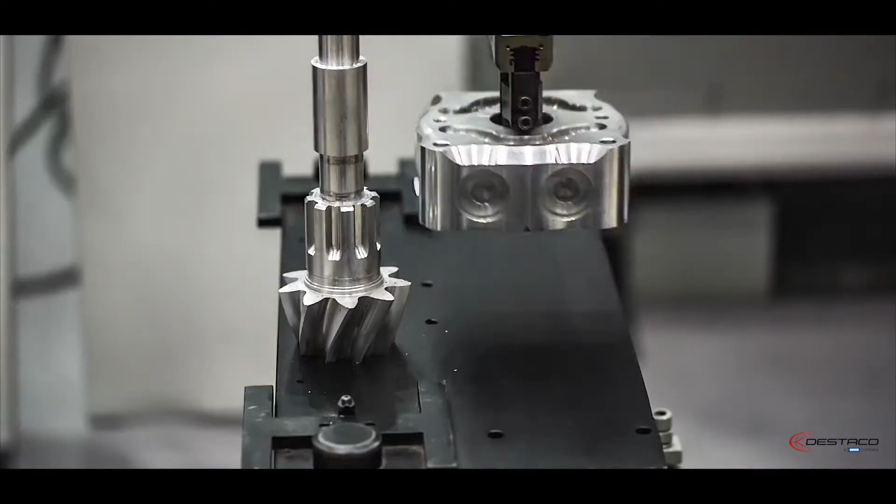As you could see from the agenda posted on our website, today's event is about the different aspects of our gripper and positioning solutions, such as how do I select the right gripper and how could this gripper drive productivity in my production, and how could an indexer provided by DESTACO support my productivity in operations. In our roundtable discussion at the end of the event, we will share latest updates on innovations and new products with you. I would like to point out that we will be offering another event on work holding and end effector applications during the second half of the year. The exact dates will be posted well in advance.

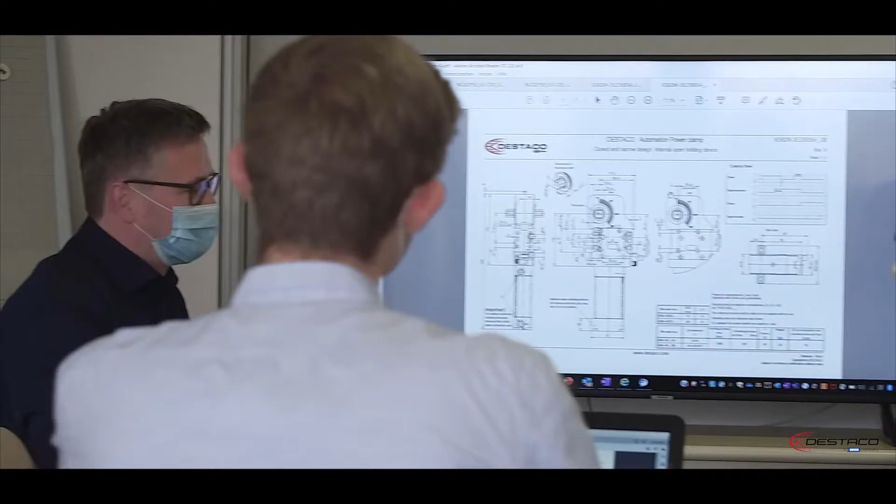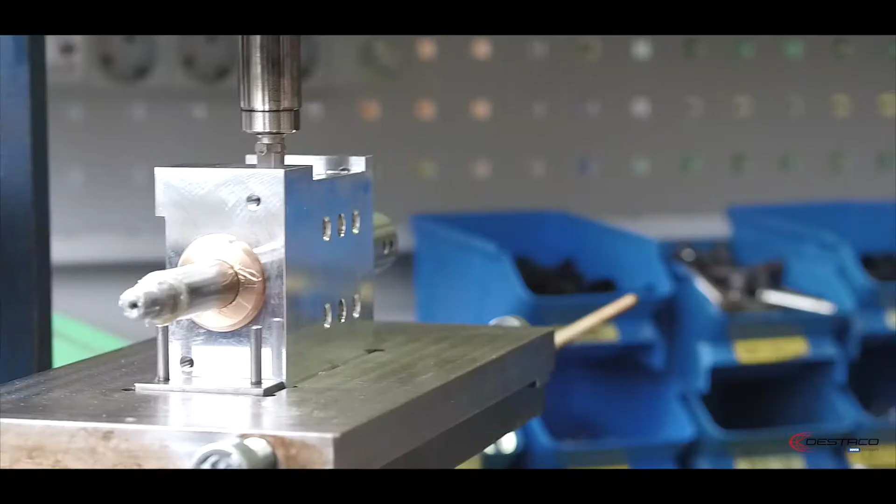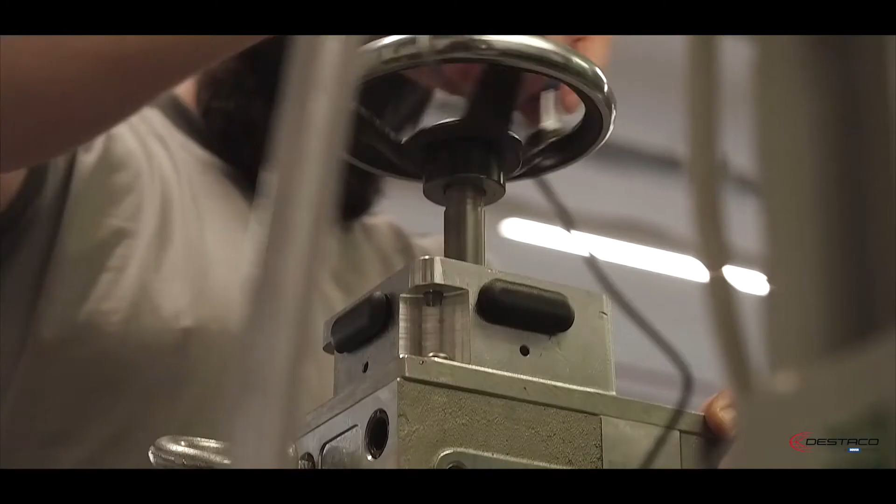DESTACO is your partner for high-performance solutions in automation, work holding, and containment. The plant here in Germany has tremendous importance for our customers, as well as for us, since it's specialized for the assembly of very complex custom applications. What defines us here in this plant is the very good qualification of our employees, as well as the flexibility that we bring in every day in order to meet the customer expectations.

Founded in 1915, DESTACO is a Dover Corporation company.

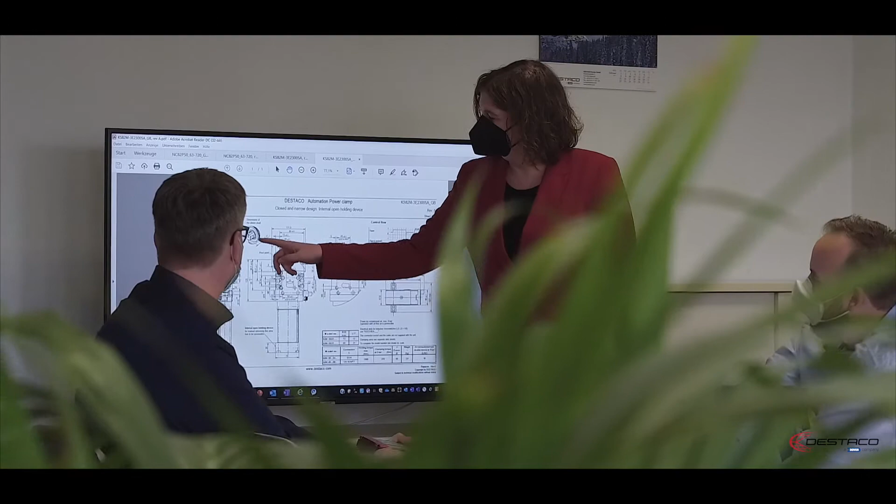My name is Nina Wollep. I'm the Global Engineering Manager at DESTACO. With my team of engineers and designers, I ensure that your demands and wishes are transformed into actual products, precise and with an innovative spirit.

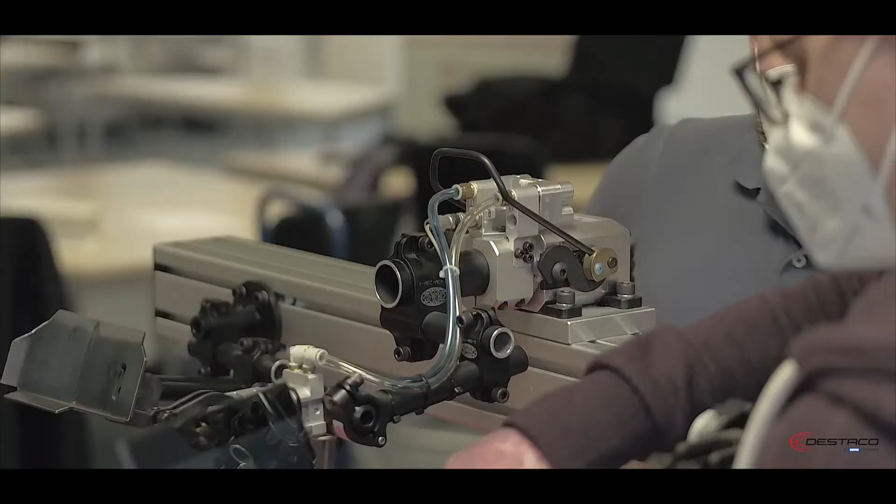My name is Christian Schubert. I'm a Global Product Manager at DESTACO. I'm responsible for planning, controlling, and strategic alignment to launch products on the market successfully. Proximity to the customer is particularly important for DESTACO to bring innovative solutions that solve your customer needs.

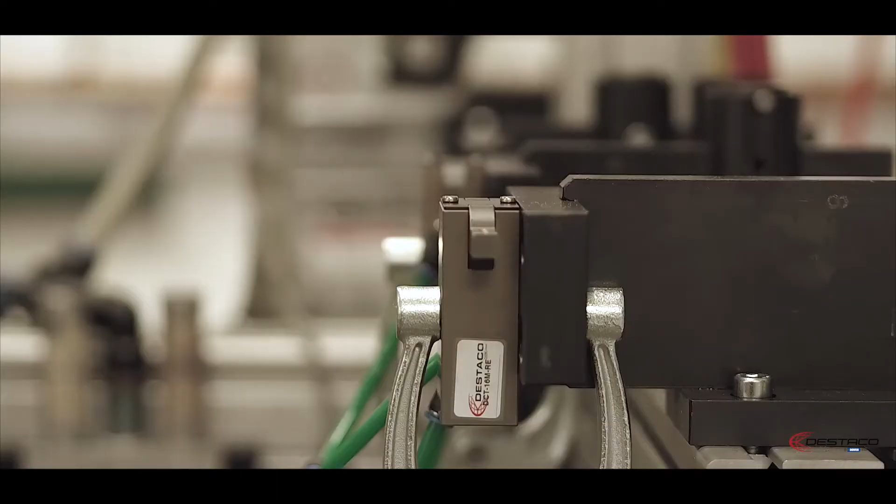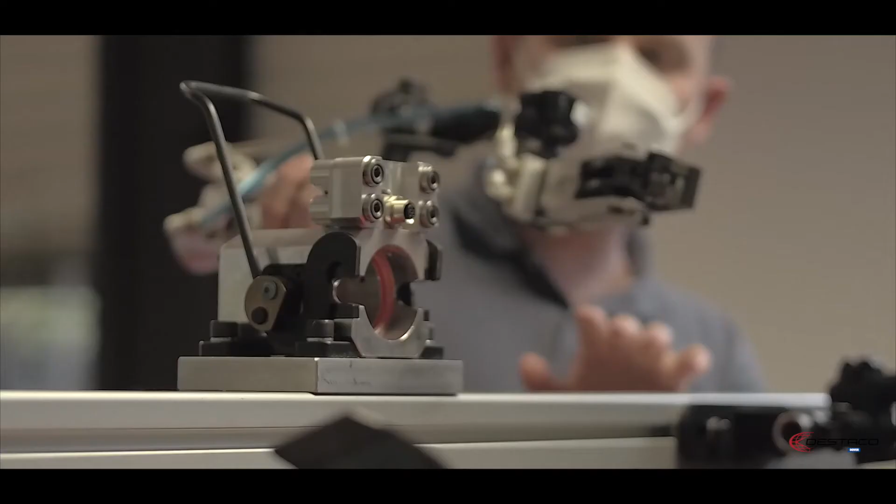My name is Dirk Fabian. I'm responsible for quality management at DESTACO. We understand quality as a holistic aspect that runs through all areas of our products, our services, and our processes. The benchmark for the quality of our products is a combination of our demands on our work and, above all, of our customers. Quality is part of our DNA and we are proud of that.

In 1936, DESTACO designed and manufactured its first manual clamp. Since then, innovation, quality, and acquisition have made DESTACO the global leader in the design, manufacture, and support of work holding, gripping, transfer, and robotics solutions for workstation and flexible automation applications.

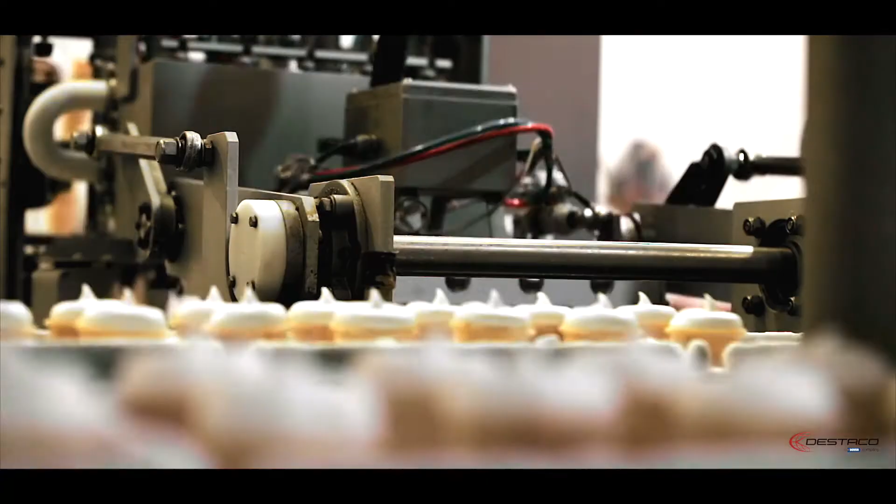After this great introduction, let's talk about automation, which is becoming globally more and more important. Today we have two experts with us, Jens Hammerschmidt, who is our sales manager for automation, and Moritz Sternberg, who is an engineer developing automation products. This is a pre-recorded conversation, but we do have experts available on chat right now to answer any questions you have during our session.

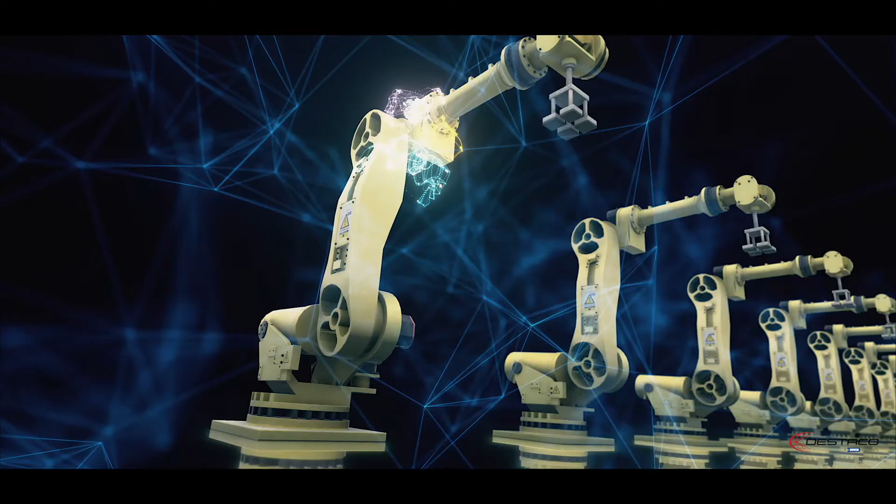The idea of automation has been around forever, finding new ways to speed up a process or activity. In today's world, automation is more important than ever. In this session, we will be discussing some of DESTACO's greatest examples of gripping and automation as we look forward to the future. Let's come to my first question. Jens, why are companies implementing more and more automation?

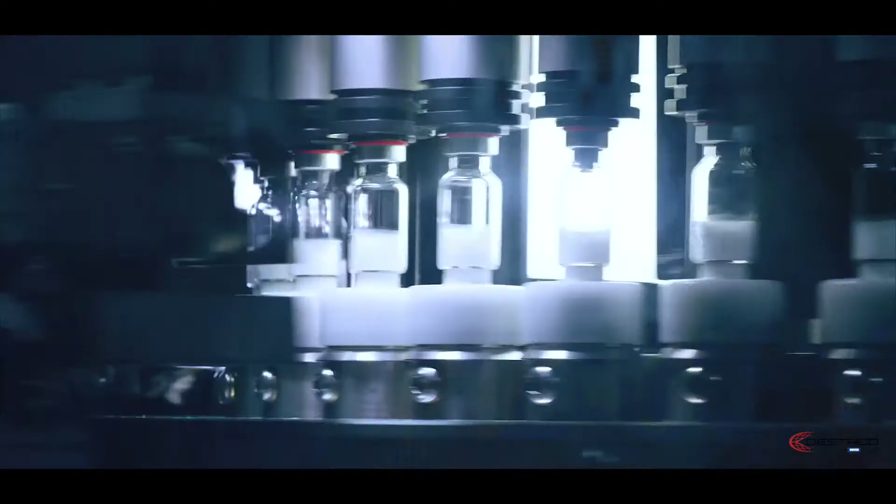One important reason is the reduction of costs. One of the factors of profitability of the robot is the decrease in the share of labor in the cost price, meaning an overall cost reduction. Robot manufacturing is flexible manufacturing. The robot can operate alone for a given time without assistance. It adapts to different production series and remains a standard product, easy to adapt and maintain.

By implementing automation, we can group the tasks together in one robotic cell. Then intermediate stocks are eliminated. Finally, we can significantly reduce the work in progress. By improving performance with robotization, initial benefits are the reduction of the number of rejects and the improvement of the overall product quality. These factors that you mentioned are key to having successful production in today's time.

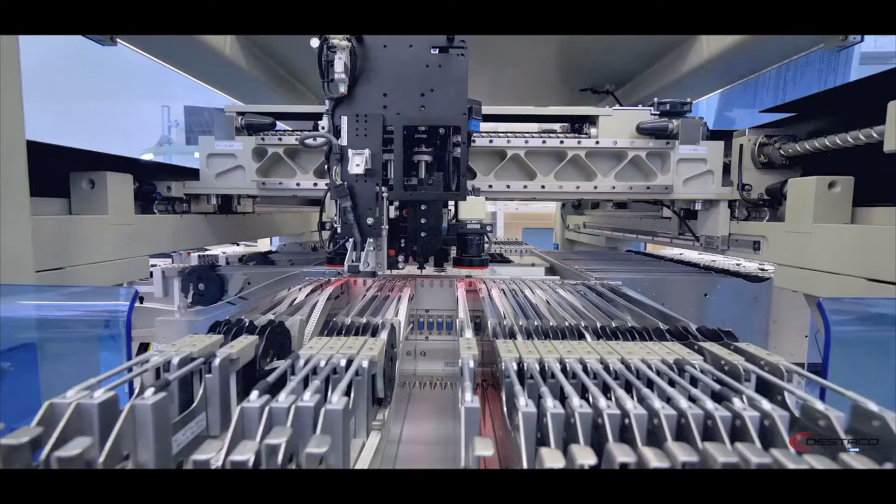What makes DESTACO the ideal partner for automation, Jens? First of all, our wide product program. We have indexing drives to rotate systems in a circular form very accurately, conveying systems in a linear form precisely with high repeatability. Both are the heart of the machine.

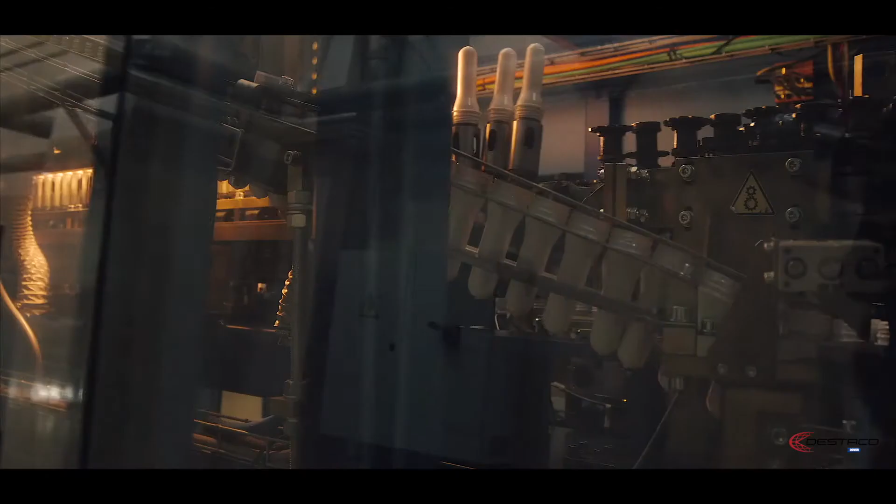Robots or gantries are another way of automation. Here we have grippers and tool changers. Our well-trained sales teams and customer service are dedicated to drive the customer and give the best guidance. For a specific or more complex application, our application engineering team and technical support is involved to follow the customer during the technical definition process to the quotation stage.

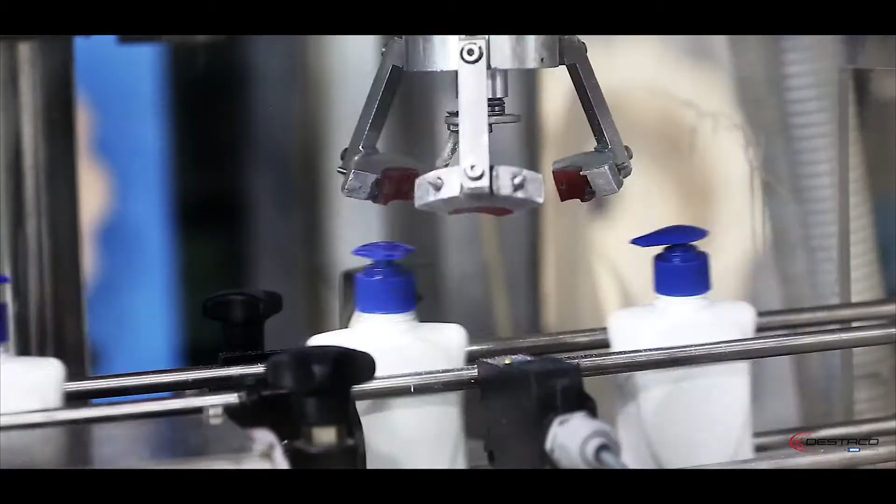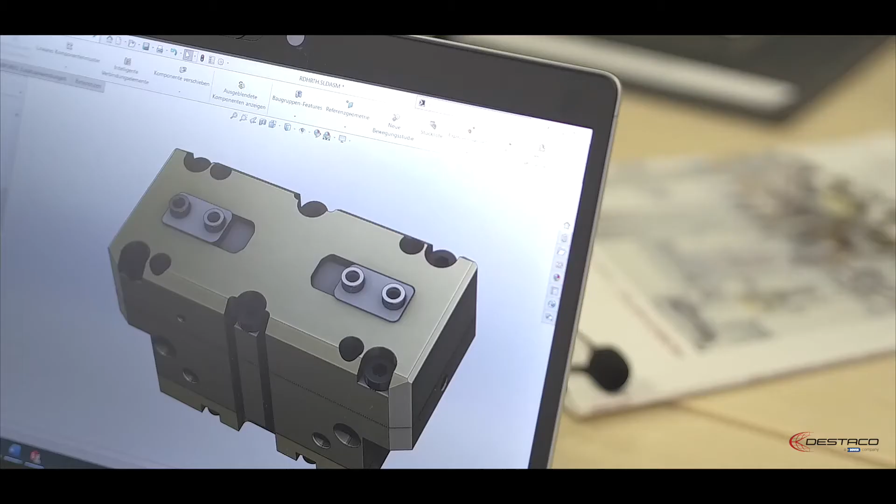Speaking about robots, you mentioned grippers. What are the specific benefits of DESTACO grippers, Moritz? DESTACO has a large portfolio to cover all market demands with cost-effective solutions. We have a large size range, from tiny grippers for life science and pharmaceutical industry, to big heavy grippers for automotive, construction or aerospace. Stroke is a key point to select a gripper.

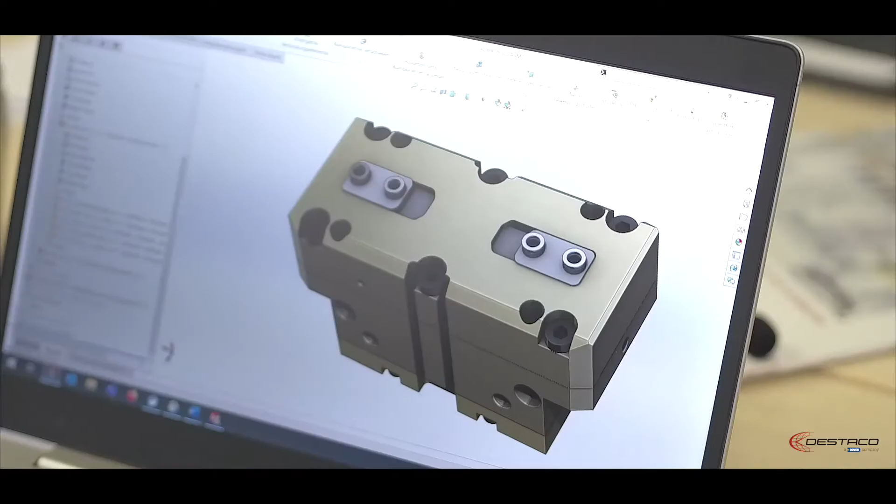Sometimes short strokes are sufficient, but sometimes extended or very long strokes can be necessary to handle parts of different sizes with only one gripper. This is often the case for packaging or palletizing applications.

Weight is becoming more and more important when we consider environment or energy saving. With internal kinematic optimization and lightweight material, DESTACO can propose more compact and very reduced gripper weight.

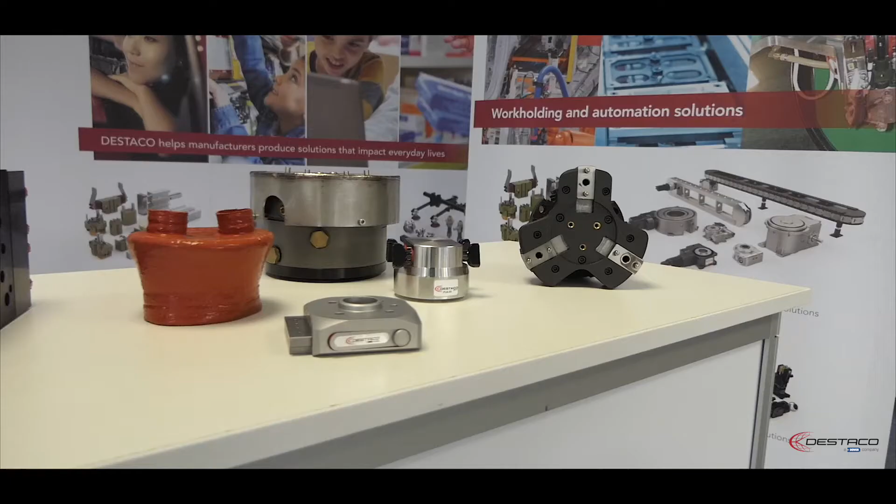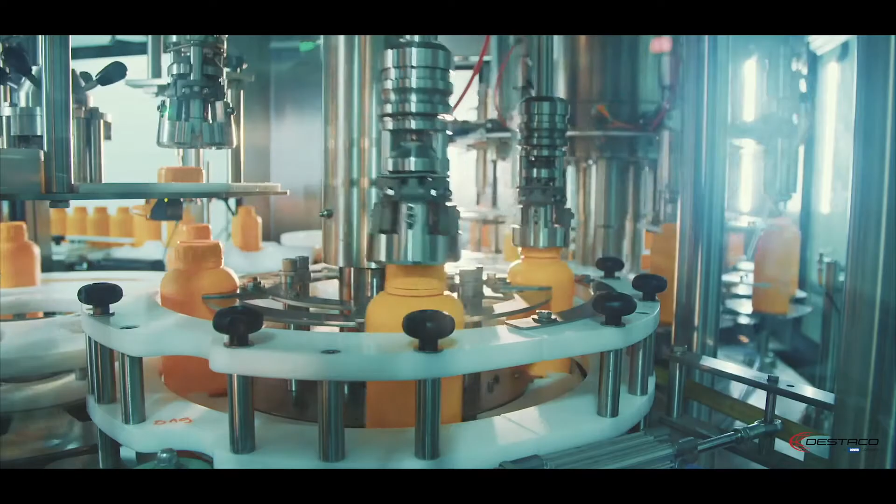To reduce maintenance and extend the lifetime of the gripper, we propose as standard different kinds of protection. These include integrated seals, plastic covers, Kevlar boots or stainless steel shields. Some grippers are IP55 certified, some others are fully enclosed for harsh environments. We offer a complete solution.

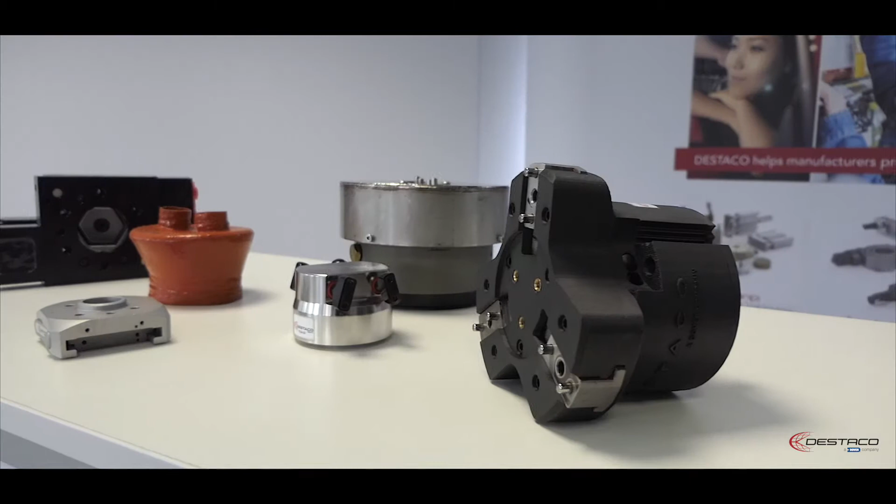We have a modular gripper series with a wide range of standard options. One option is tandem. The purpose is to double or triple the force by adding 2 or 3 additional pistons. If necessary, we can even replace air pressure by hydraulic pressure for even more power. We can always find a dedicated gripper solution, manual, pneumatic, hydraulic, and increasingly more electric.

While we're talking about grippers, What are the different types of options for grippers, Moritz? Before any choice or recommendation, there are a few things to consider. First of all, the environment. Do you need liquid, oil or dust protection? High temperature, heavy duty or even corrosive environments?

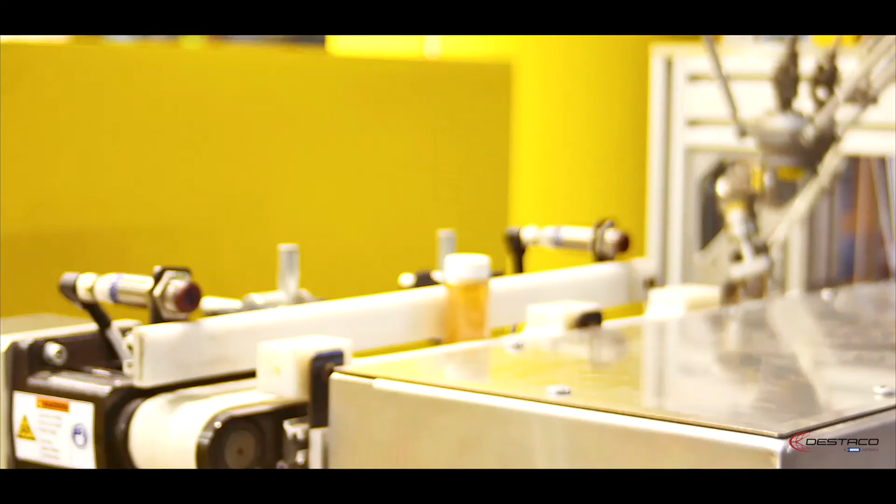Which kind of product or material will be handled? Steel parts? Plastic parts? Glass or wooden parts? Any other constraints, such as cycle time, torque, inertia, or specific restrictions like very long or enclosed fingers. Different technologies are available, and this will lead us to determine the gripper range.

Secondly, which options or features are required to fit as best as possible with the application. And last but not least, overall budget is also a key point. Do we really need high level of accuracy, high-speed movements for short cycle times? These are the key questions to select the proper gripper in line with the budget.

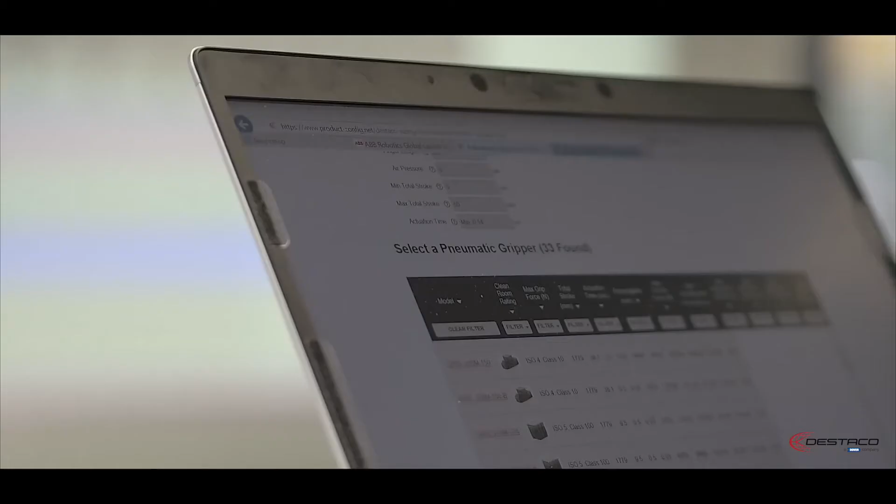What do I have to consider when choosing a gripper? How can I find the one most suited to my application? A good option is our RoboSizer software. It's available on the DESTACO website and an easy tool to define the right gripper for your application. Many grippers are off the shelf in the majority of cases and part of our Express program.

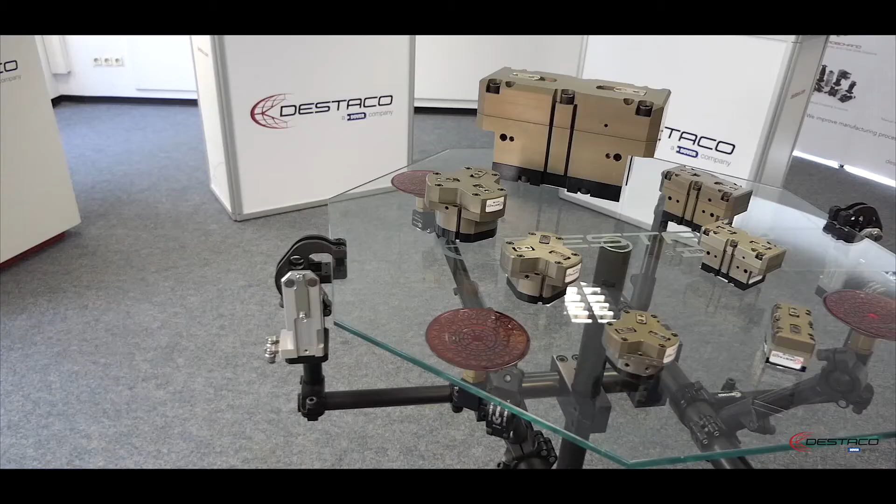Take for example our RDH-RTH series. It covers most market demands. RDH-RTH grippers are cost effective and available on stock. That means a dominating grip force compared to the market. Sealed operation means low to zero maintenance. Long finger length to extend reach into tight spaces, and size consistency. With or without spring, the housing does not change.

We have sales and technical support in place. Based on customer requirements, specifications, and environment, we define together the best gripping solutions.

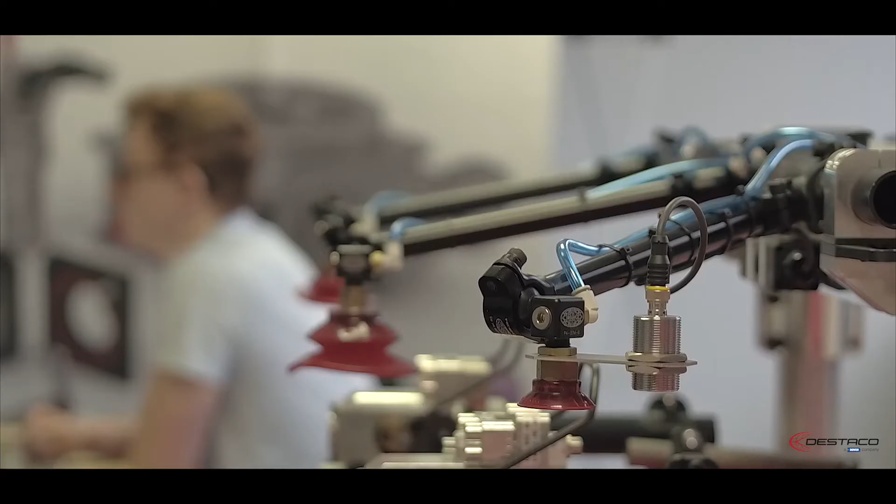There is an example with a very long frame and 16 grippers in the process. The purpose was to grip and move very long wooden panels by robot in all directions. We worked together with the integrator on this challenging project, mostly for tool changer sizing, where we require a heavy payload or high inertia and speed movements. The support of the DESTACO engineering team is required.

This is directly linked to safety. Traditionally, DESTACO has been a company that has focused on the automotive industry.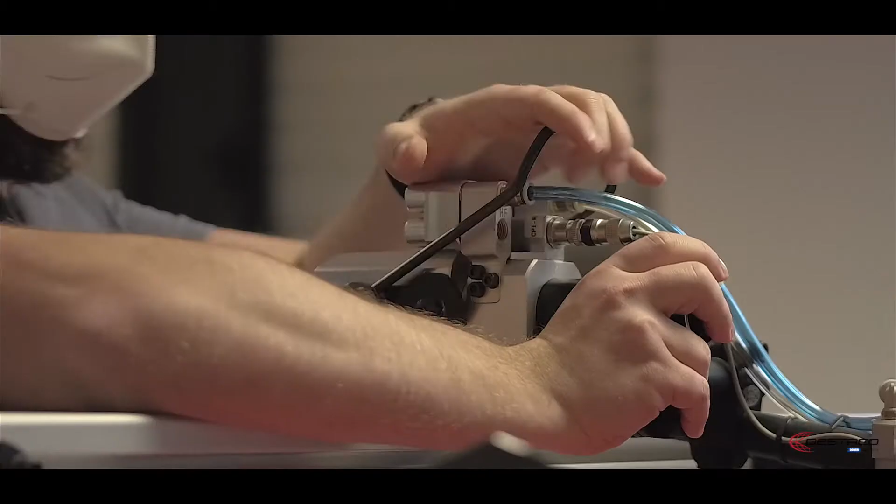Jens, does Destaco provide solutions for other industries too?

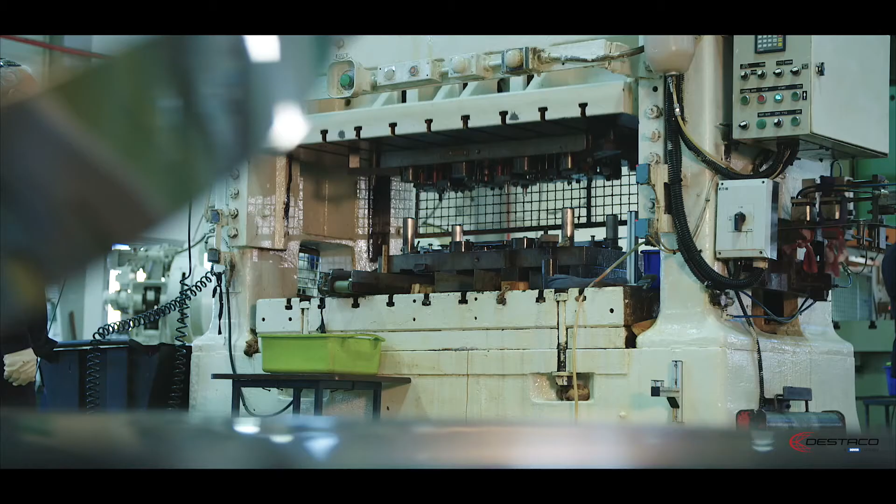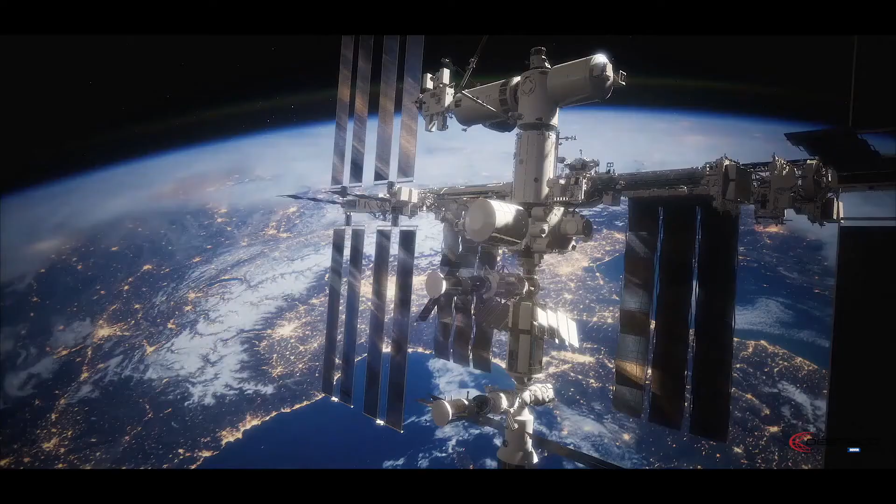The automotive industry is directly linked to general industries for the majority of components, and finally to all diversifying markets. In general, it has a model function for all other industries. We have dedicated products for foundries and automotive, but also for electrical motors, aerospace, battery production and all other industries, for big pieces, for small pieces, for very high temperature or heavy duty applications.

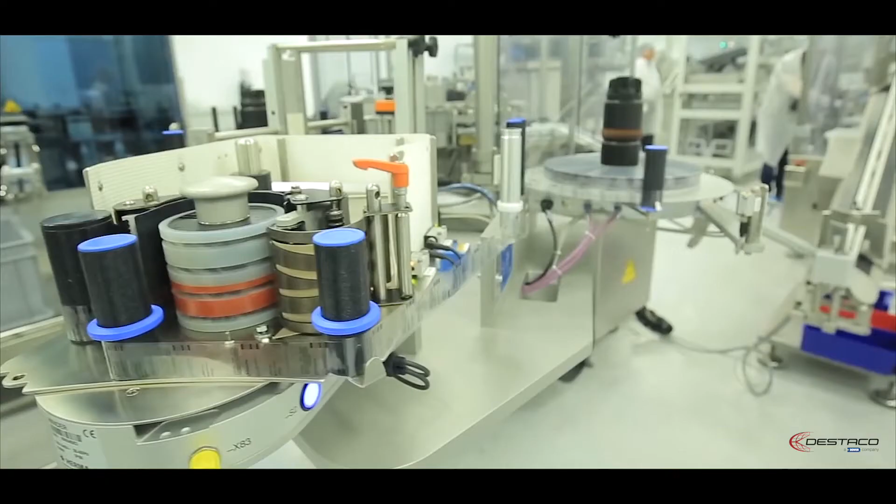Robotization is growing in diversifying markets like consumer goods, plastic industry or life science. Cleanroom dedicated grippers are also available as standard.

We have solid experience in the food industry, with applications for packaging and with direct contact to the food. The restrictions are clearly defined: no contamination from the gripper, and fully enclosed and protected from the outside when cleaning with high pressure.

As an example, there are standard grippers made of stainless steel, fully enclosed. The fingers are designed and adapted to cheese manufacturing, and therefore cleaning with high pressure.

Collaborative robots are one of the main pillars of Industry 4.0. Destaco proposes its ultra-light and compact tool changer for cobot cells, a very low profile and coupling solution with pneumatic and electrical pass-through. Many clients want their suppliers to provide customized solutions.

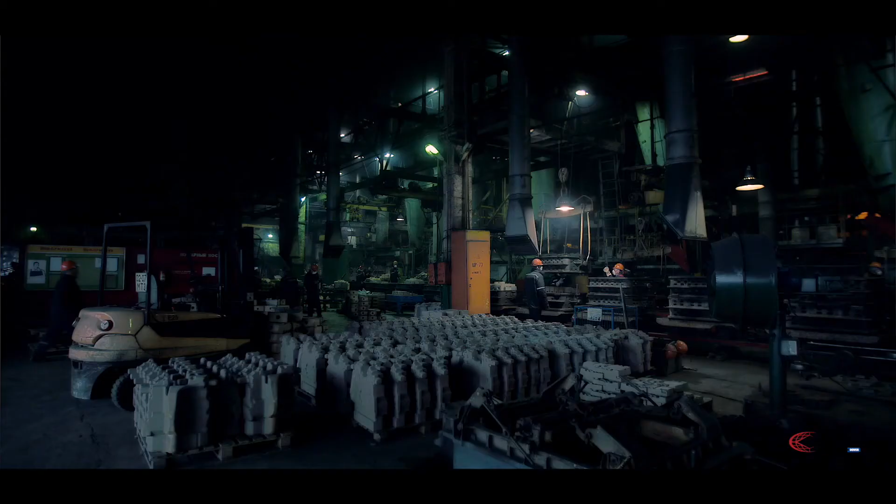What are some examples of customization at Destaco? Destaco has a long experience in the aeronautical engine industry. We developed hydraulic mandrels with a high level of accuracy. This success in aerospace was an opportunity to propose additional gripping devices for high precision in machining or pinion cutting.

Regarding rough environments, Destaco offers complete solutions for dust, sand or water protection. That means we have the right gripper for every application. Most of our grippers can be made of stainless steel instead of aluminum and steel, adapted to corrosive environments, nuclear or food industries, everywhere special requirements are demanded.

All tailor-made solutions can be integrated into a particular environment. We can propose grippers with multiple jaws, 4, 6 or 8 jaws, large through hole when cutting long bars, or special body design for specific environments.

We have discussed both standard and customized products. Jens, I think a key question customers will have is how do you ensure the longest lifetime of those products?

First of all, you have to use it in a proper way. Read the instructions and the guidance and don't use it for any other purpose. Our grippers are guaranteed for at least 3 million cycles. No maintenance is needed when using them correctly.

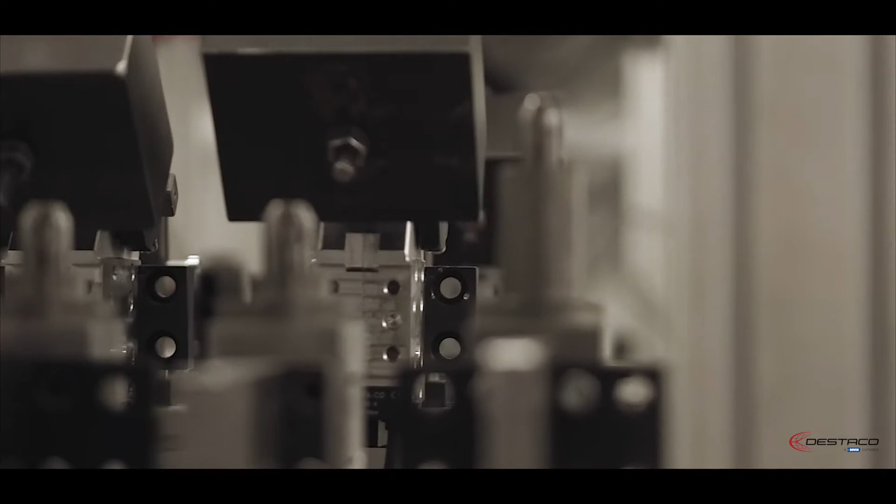It's important to notice that all grippers can be repaired. The user can repair it himself. In this case, seal kits for repairing and spare parts are available, or through the Destaco repairing support. Then a new guarantee is effective.

Note that technical support and expertise at the customer's factory is available. Sometimes it is not possible to send back the parts to us, so you need the expertise on site. Regarding the aftermarket, our sales team, customer service and distribution network is available to give the best support. Don't hesitate to ask us if you have any questions about our products.

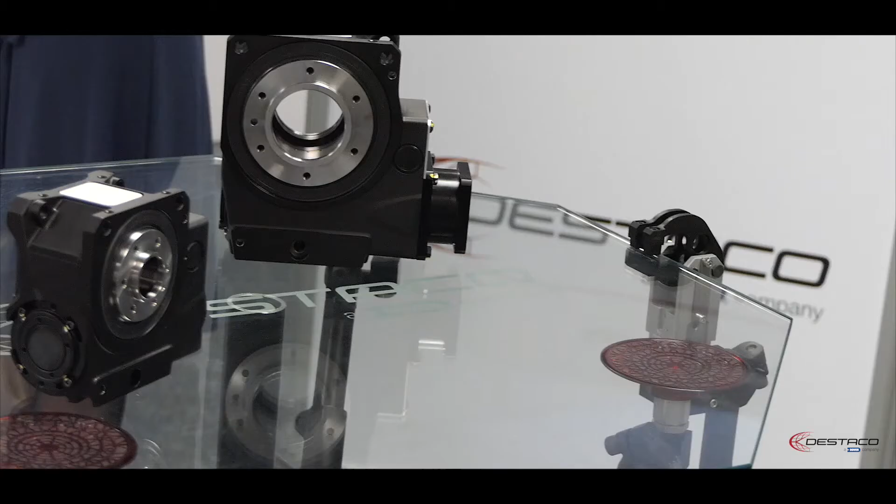During operation, indexers offer a very high positioning accuracy and excellent repeatability. This high level of accuracy is maintained over the entire service life, even in high-speed applications. In most cases, this is well over 100,000 hours, which corresponds to over 11 years of continuous running. The long lifespan means high profitability.

In terms of total investment, index drives are cost-effective alternatives compared to servo applications, especially if you include the cost of control, software, cables, programming and equipment. If you only consider the dwell time of an application, a servo motor is continuously drawing power, whereas an AC motor simply stops and will not draw any power until required. This means that index drives are also gaining importance from an environmental point of view.

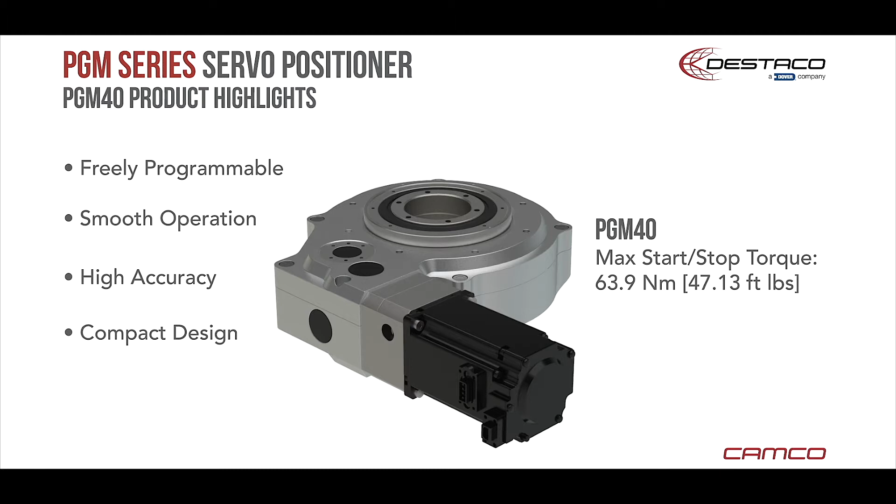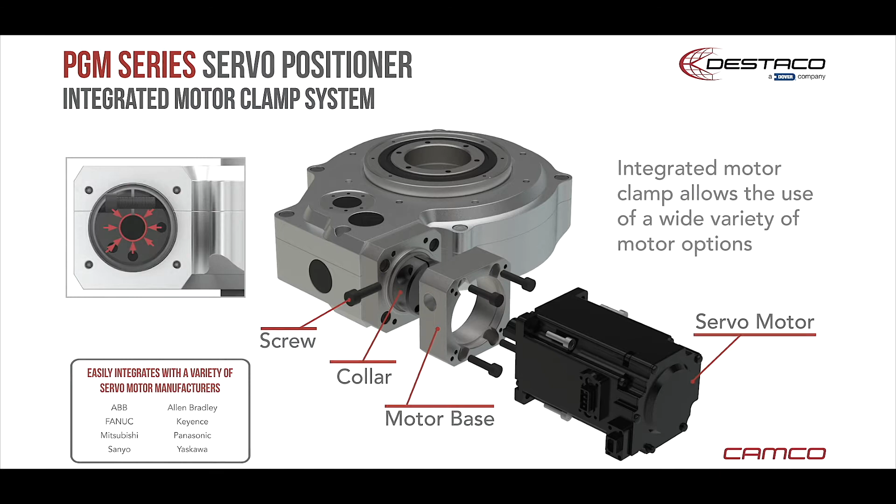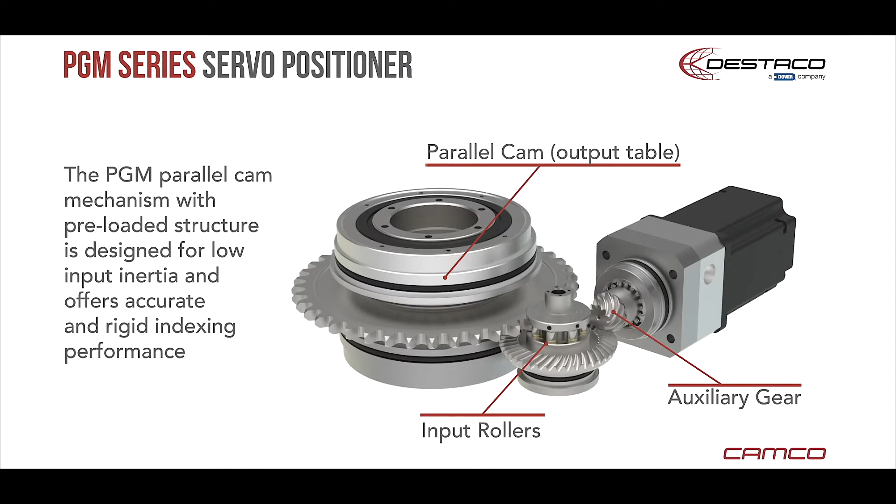If higher flexibility of the system is required, all our indexers can be modified so that they can also be used as servo axes. For this purpose, servo drive technology is combined with index drives to use the advantages of both worlds. Our GTB and PGM series in particular already offer those advantages as standard: full flexibility combined with high stability, a large center bore, and above all, a high level of accuracy and repeatability, thanks to the backlash-free mechanism.

Moritz, you have made the case on why indexers are still relevant today. Going into detail about DESTACO indexers, how precise are they?

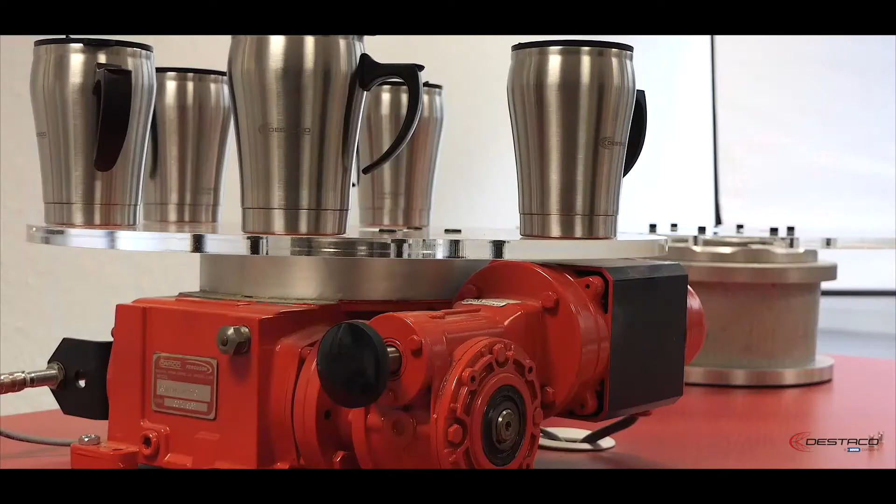As already mentioned, indexers are characterized by a very high level of accuracy. There are different terms that play a role here: backlash, positioning accuracy, and repeatability. Let's start with backlash. The backlash is, so to speak, the air between the components and is therefore the deviation of the position in the event of a load change.

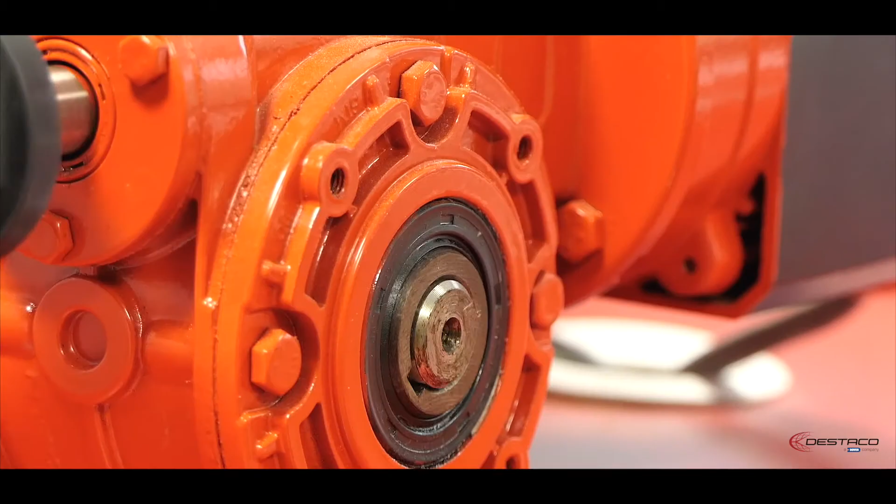With most servo gearboxes, a backlash of 6 arc seconds is rarely undercut. In addition to the measurement and control system, this sets the limit of accuracy. This factor is not relevant for index drives, as they are set up backlash-free.

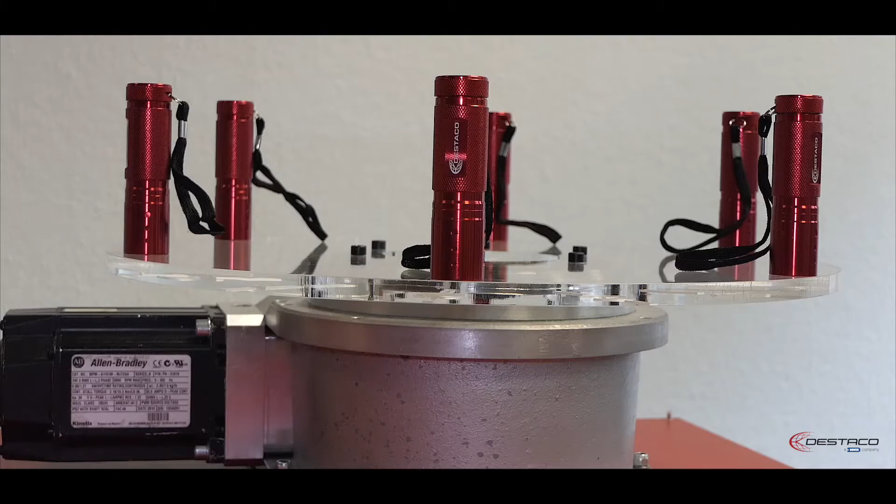The positioning accuracy is the accuracy with which each individual station can be approached. With our index drive, a positioning accuracy of up to 12 arc seconds is possible. This means, on a diameter of 2 meters, a deviation of just 6 hundredths.

The repeatability is the accuracy with which the same station can be approached repeatedly. Due to the mechanical locking, the absence of backlash, and the always identical pair of components, a repeatability of up to 3 angular seconds is possible. With a diameter of 2 meters, we are talking about only 1.5 hundredths.

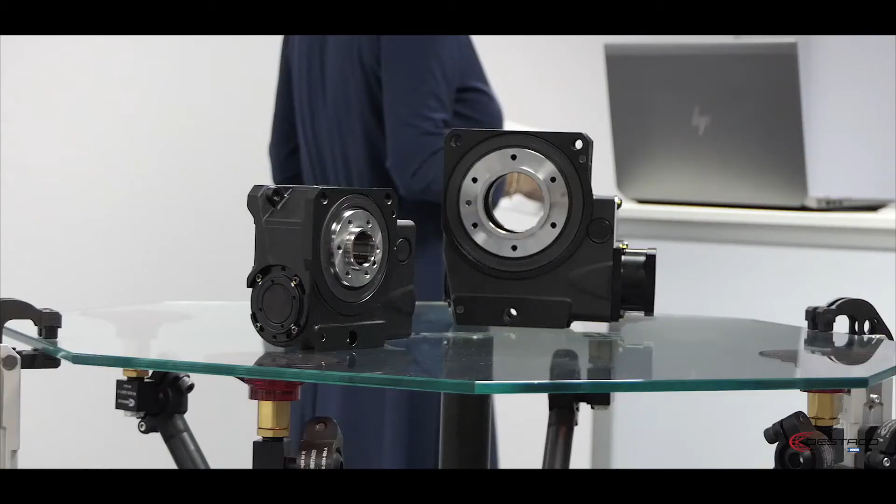Especially in high-speed applications, the control system is the limiting factor for servo applications. Indexers are set up backlash-free and are independent of measuring and control systems. This ensures that precision is maintained even at high speeds. Indexers can therefore show their advantages best when it comes to precision. To guarantee this, every indexer is checked for exactness before delivery, to guarantee the best possible product for our customers.

Frank, could you please give us some examples of typical applications for indexers? Of course, Edith. There are several applications that are based on a clocked process. Think, for example, of filling bottles in the food industry or filling blisters in the pharmaceutical industry.

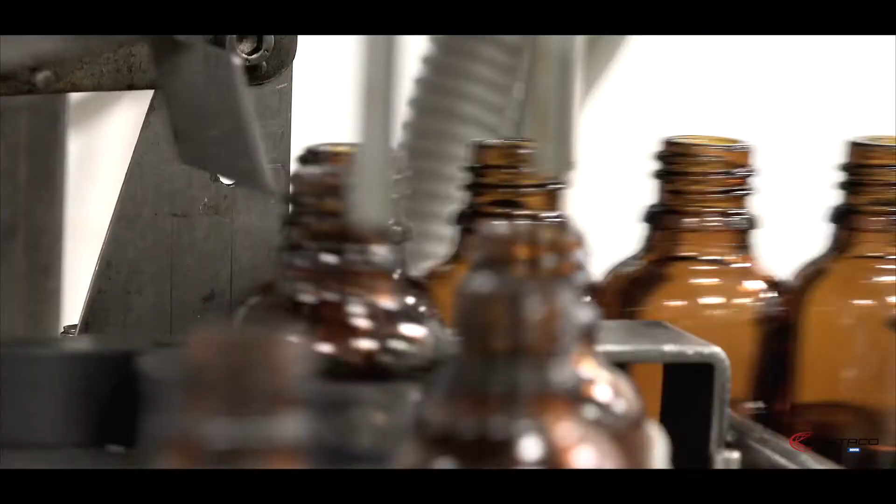In many production areas that are automated, indexing solutions can also be found for assembly actions, processing steps, for printing or packaging. Indexers are used in particular where speed or precision in the individual process are important. Our solutions can be found everywhere from automotive to consumer goods to the packaging industry.

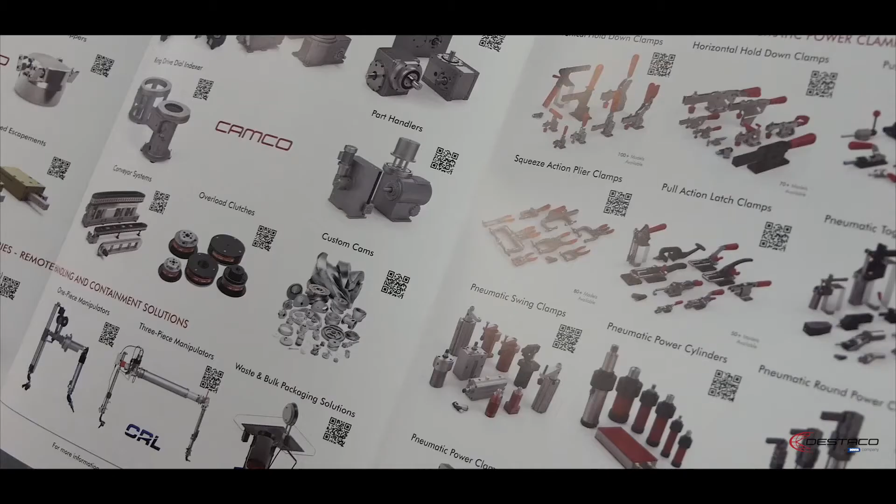Frank, when it comes to indexing and its applications, which you gave great examples of, how does the DESTACO product family make a difference? First of all, DESTACO offers a wide range of automation products for a wide variety of applications. We are a full service provider for pick-and-place applications and similar processes, from grippers to vacuum cups and clamping technology to indexing. This scope is unique and enables us to have unique expertise for the entire automation process, which is available to our customers to solve their problems.

With regard to index drives, DESTACO offers the most comprehensive range on the market. You will find rotating solutions such as indexing tables, as well as linear solutions, such as our high-precision conveyors.

Whatever your application requires, whether slow or fast cycling, maximum precision, heavy loads, or whatever combination of properties you're looking for, you will find a solution in our comprehensive range of indexing products.

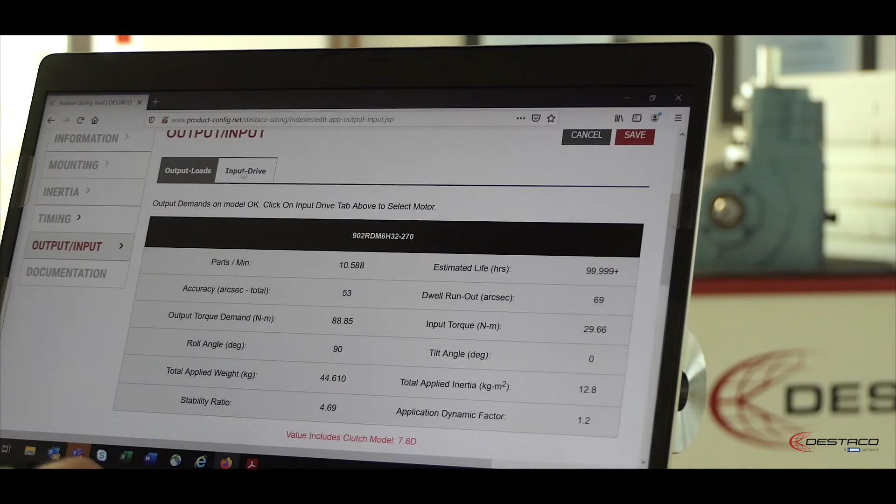Moritz, how do I choose the right indexer for my application? This is actually quite simple. At DESTACO, as with the grippers, we have various options for this. The first is our indexer sizing tool. By entering the application data, the right index drive for the application can be selected in a guided program, also with our support. Reduction gears and even the right motor can also be configured here.

But especially when planning complex systems, there are often more things to consider. Our trained staff can competently help you with the design and project planning. Visits on site are both possible and desirable in this context.

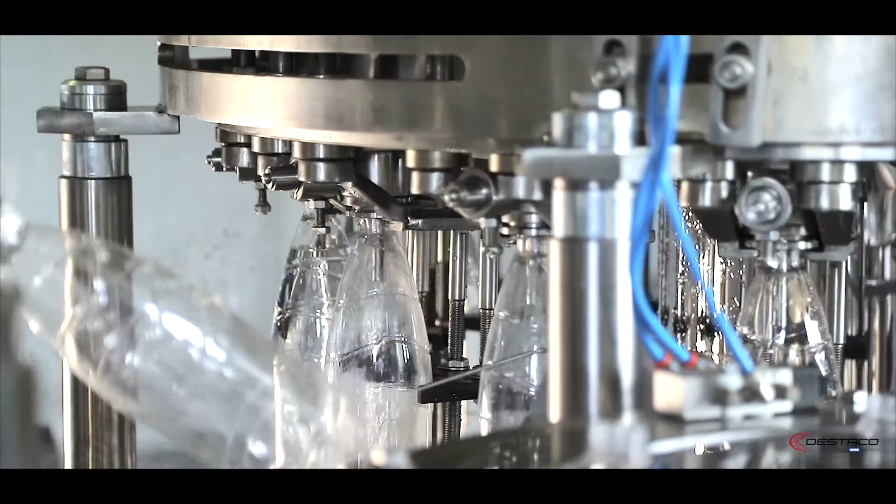If I can't find the right indexer, is it possible to get a tailor-made solution? Since both motors with reduction gears and motion sequences, for example pendulum motions, can be freely selected, there is hardly an application that is not covered by our product portfolio. However, should the case arise that none of our products meet your requirements, designers in Asia, USA and Europe are available to help the customer with advice and action to find a tailor-made solution for their problems.

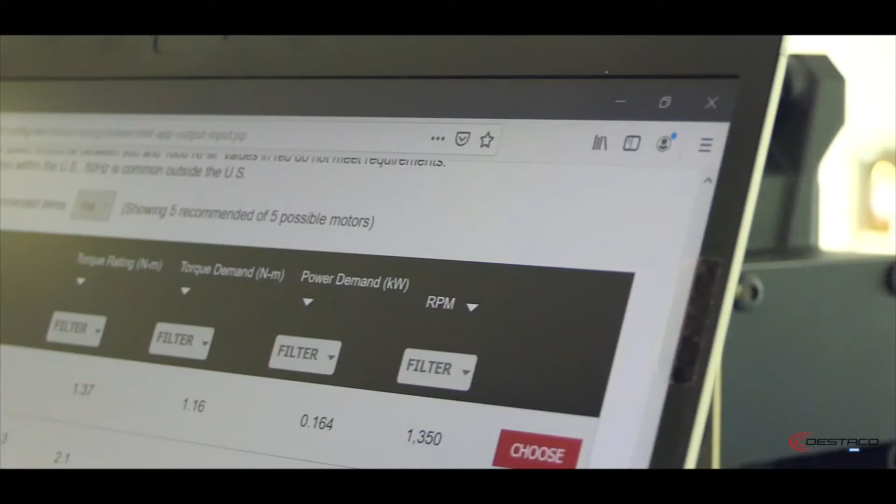Frank, does DESTACO offer an after-sales service for indexers? We are where our customers and their systems are and provide service and maintenance work by DESTACO or by a service provider. This way we can ensure a global on-site service by competent and trained staff. We further also offer service instructions as well as spare parts, which is important when our indexing gears have been in service for several decades.

We don't leave our customers alone after the products have been delivered. This gives our customers the security of being able to operate their systems over the entire product lifecycle without costly redesigns. Thank you, Moritz and Frank.

That was our session on indexing. Our next conversation will focus on new products and innovations. Stay with us.

Welcome back to our roundtable discussion. As mentioned earlier today, we are at DESTACO's European headquarters and will talk with our experts about new products and innovations.

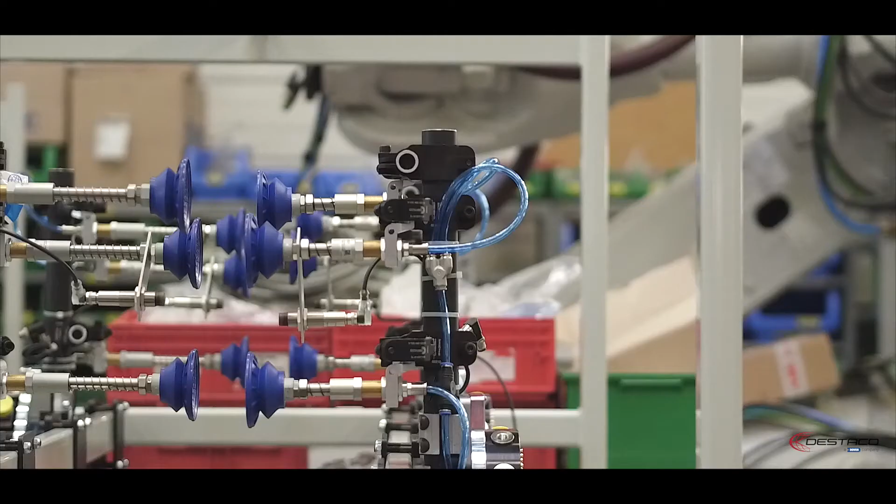I would like to welcome to our session Stefan Eggers, Managing Director of DESTACO Europe, Sylvain Willem-Lang, Director of Sales and Services EMEA, Osama Ansari, Director of Global Distribution, and Vincent Pantin, our Automation Sales Manager, who will be joining us from France. It is great to have you all with us.

DESTACO has been known for the production of high-quality power and manual clamps, but for a number of years the company has branched out into other key business areas. How does automation fit into this, Stefan?

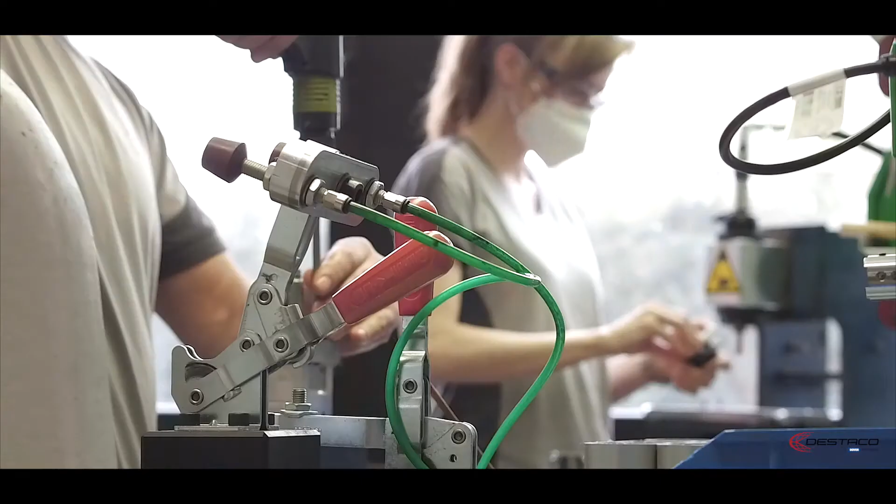Thank you very much for asking that question, Edith, as this question is asked from our customers from time to time. DESTACO is a well-known brand for decades of years, founded in 1915 in Detroit. With providing the first toggle clamp, we started our journey as a leading company for work holding applications. Especially in the 1990s, we expanded our footprint, but also our product portfolio to what we are today.

Work holding applications are still a foundation of our business and are used in almost all markets across the globe. However, today we are serving our customers with a wide range of additional products related to automation, such as indexers, grippers, conveyors, and tool changers. Until today, our work holding applications are a foundation of our business, used in almost all markets across the globe. So I'm happy to hear that our brand and our products are visible on the market.

Sylvain, would you please provide more insights about the automation markets we are serving? We are covering various markets such as automotive, general industry, life science, food and packaging, aerospace, pharma, consumers. On indexer, we have two brands, Camco and Ferguson. Camco is our brand for general application. With Ferguson, we are mainly present in pharma, cosmetic, packaging, and general industry. On grippers and tool changers, we have success story in automotive.

In terms of market coverage, we have direct and indirect sales. Direct sales is with our team, mainly in France, Germany, Netherlands, Spain, and also in Poland and Czech Republic. Regarding indirect sales, we are doing that with our general partner.

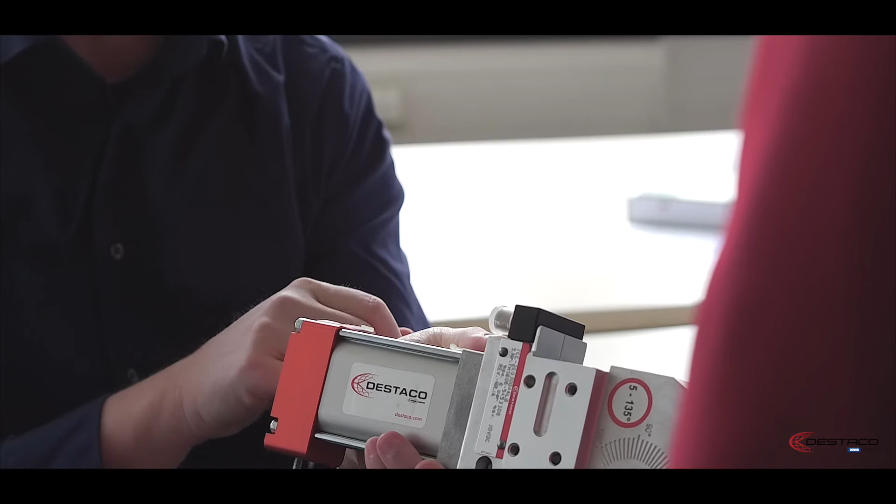In combination with our partner networks and our facilities within the regions, we are bringing our products very close to our customers. Our employees, partners, and global supply chains are highly committed to our quality standards, enabling us to provide common high-quality standards independent of where you order or where you use our products.

Close cooperation with universities and external R&D departments allows us to provide the latest technology standards to our customers. And in case our products don't meet your expectations or technology needs, please reach out to us. Our application engineers in all regions—Americas, Europe, and Asia—are happy to support and customize your products.

Sylvain, could you please describe our capabilities on applications and customization? The idea is not to offer only products, but also a tailor-made solution for our customers. Our grippers are famous in difficult environments, such as high temperature, forging, and arc applications. Our local application teams are located in Germany and in France.

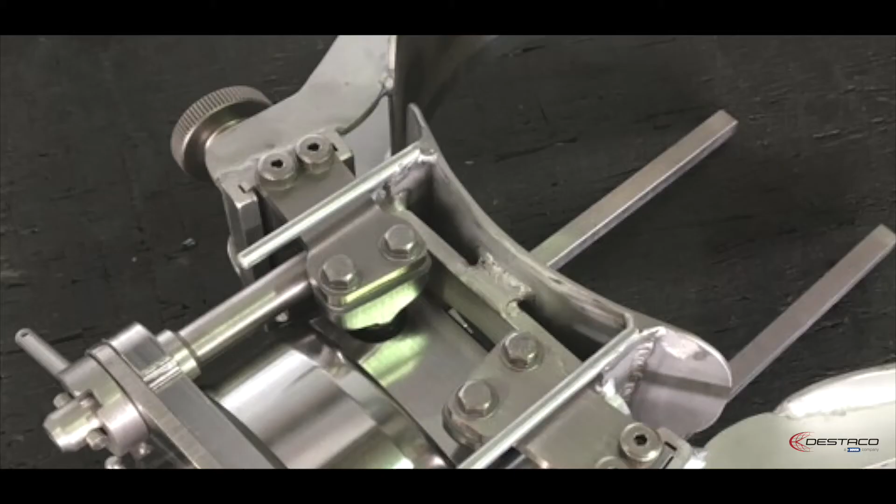I can give you some recent applications we did. For instance, in the cheese industry, restrictions are high in terms of contamination barrier. Therefore, we have a specific food gripper, FUA, which allows direct contact with the product.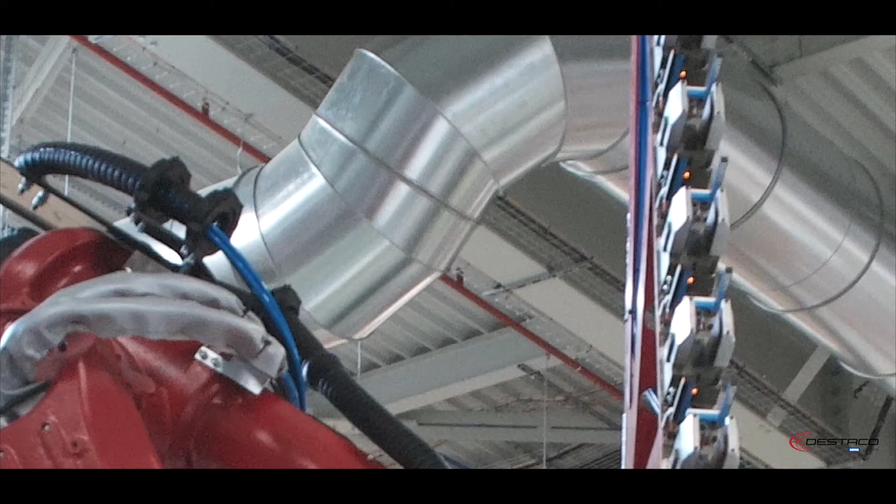We also did a great application for champagne, specifically on their corking process—a nice combination between grippers and indexers. We have increased productivity with our grippers on wood panel handling for a famous kitchen manufacturer. The constraint was the length of the panel manipulated by a robot.

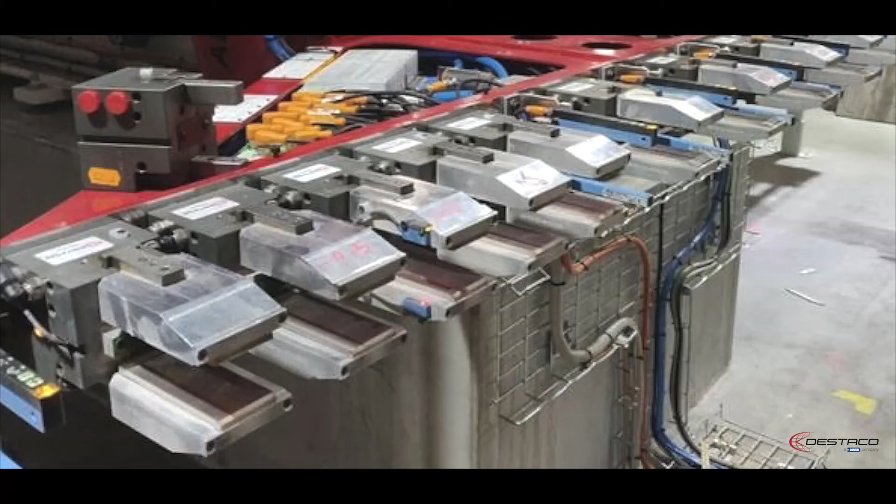We have discussed automation at Destaco, including added value proposition and channel partner activities. Now let's look at some of the latest trends. What would you say, Stefan, are the key technology trends right now, and how is Destaco adapting to them?

Independent of our product line, we are facing various technology trends on the market. These trends are creating a strong demand to supply products to our customers which enable them to monitor their production parameters in real time and much more holistically than in the past.

As a result, we are currently verifying modular and product-line-independent servo, drive, and control concepts which enable our customers to realize these solutions. A cost-effective alternative is given by innovative standard motor solutions we are verifying as well.

Secondly, I would like to highlight the impacts of legal regulations with regard to reducing CO2 emissions of production lines. This leads to several activities within our company to change concepts which allow our customers to reduce or even eliminate the use of compressed air.

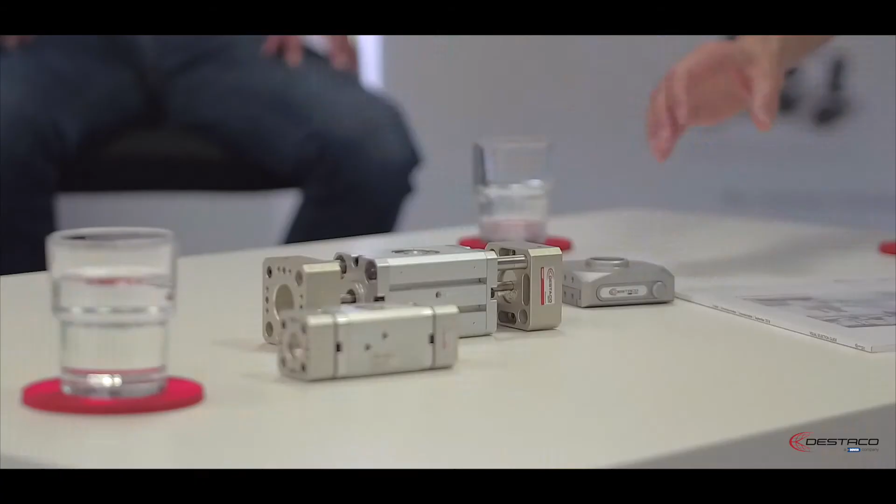The TC1 is a manual tool changer for cobot and highly flexible applications. It's ultra-light and compact, with excellent repeatability, cost-effective, high performance, and simple to use. We also have different electrical module interfaces.

Weight reduction, as Stefan mentioned, is also one of our topics. We are doing some 3D printing tests on lightweight grippers, 2 and 3 jaw. The weight reduction is around 30% on average, allowing flexibility of design for the customer application and also faster time to market.

We have just provided one of our customers a docking station for our standard tool changer, RQC, on a welding application. This is a turnkey, modular solution for all sizes. Our automation team is working with our smart clamp engineering team to adapt the smart solution used on the power clamp, aligned with Industry 4.0, for our grippers and tool changers.

Destaco's growth has been centered around premium engineering. Another part of that growth has been the acquisition of a number of companies—historic brands like CCMOP, CPI, and Ferguson. Destaco has now decided to reintroduce the Ferguson brand. Sylvain, could you please talk us through this process?